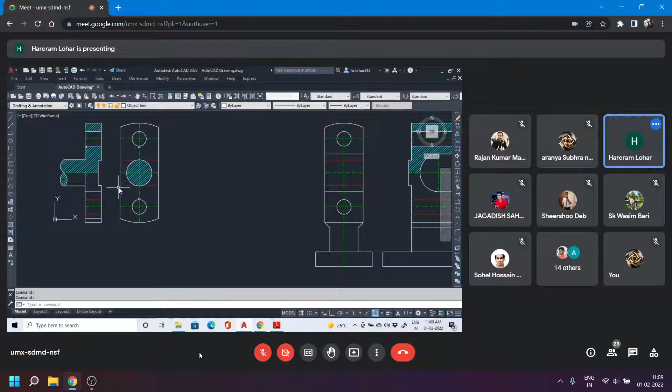So first you have to draw the details drawing using AutoCAD, and your details drawing will be of such type. You have to place the dimensions; I have not shown the dimensions here. So this will be for the rod end. This is the front view. This is the left side view. And this will be the body. This is the front view, this is the right side view. This will be the cover plate. And this will be the brass component. This is the front view, this is the side view, and this will be for the hexagonal nut.

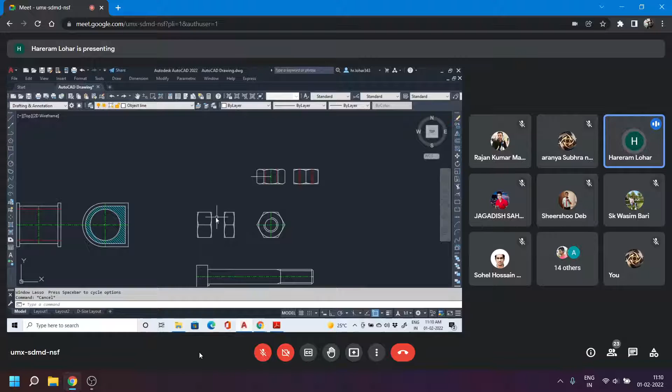So what will be the front view of the hexagonal nut? This will be that one. If you consider this one is the top view, the front view will be of such type, and the corresponding side view will be that one. In your drawing, you have to obtain the side view only, because this is the side view of the main nut, and this is the side view of the lock nut. Only this length will be different; the way the nut is drawn, the chamfer or radius, will be similar to the main nut. Only the height will be different. Here it will be 28, here it will be 20.

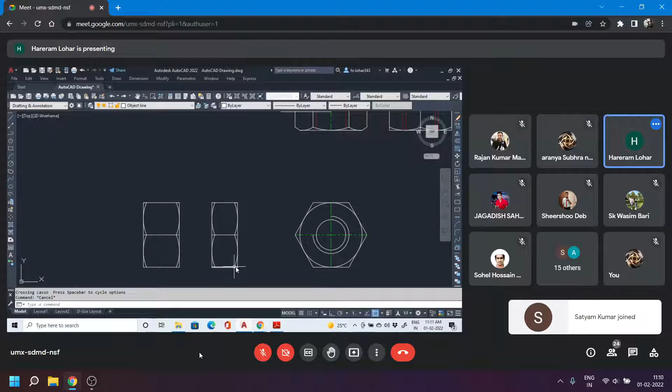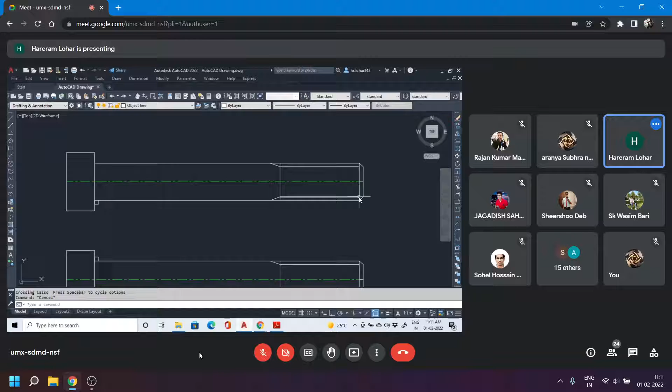And this one will be the bolt, a cylindrical headed or circular headed bolt. The shank portion will be there that we have already discussed, and this will be the threaded length. You have to represent the thread, so whatever the height of the thread, you have to show here. When the drawing is completed, to obtain the front view, you just copy the items. One copy of this main body portion you place here, then you place all other components. So you have to place this brass inside this slot.

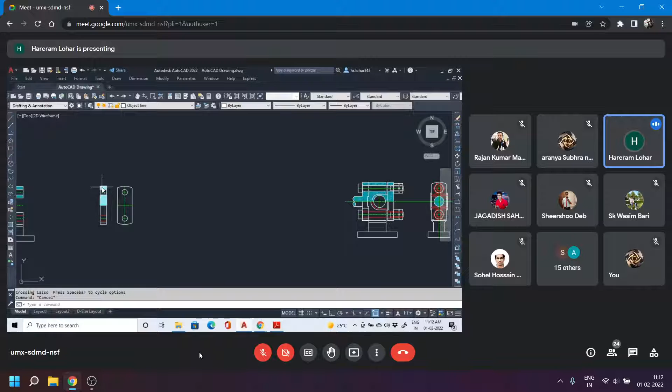Then on one side it will be the cover plate. Okay, one side it will be the cover plate. The front view of the cover plate you have to attach here. This one will be the cover plate. And on another side it will be the rod end. This rod end you have to attach. You have to assemble. Okay.

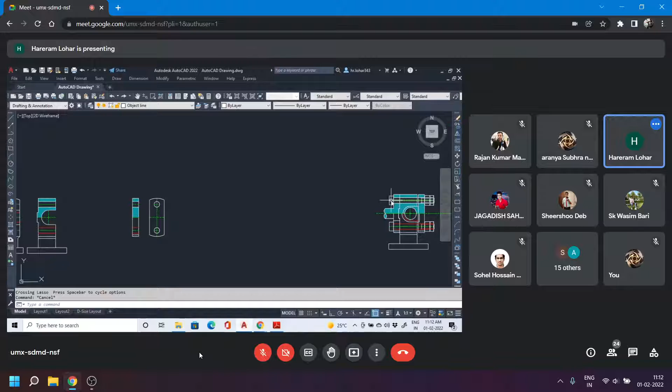Then you have to insert the bolt. Then you have to engage the nut, main nut and the lock nut. Then your drawing will be of such type, because it will be a half sectional view. So that's why the sectional view for the upper half portion will be there, and whatever will be the orthographic view, that will be for the lower half portion, not the sectional view.

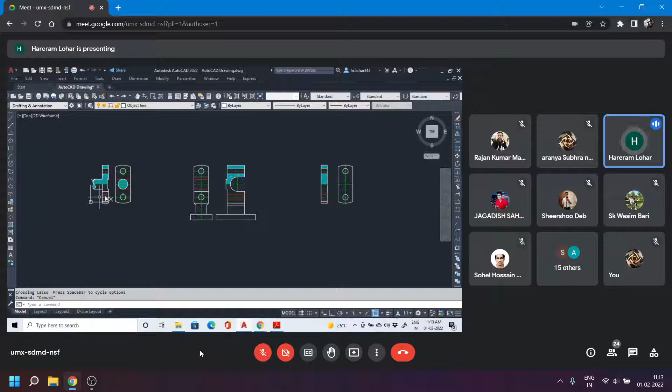Then again you have to obtain the side view of this one, and we'll draw the side view. All the component side views we have already drawn. So this will be the side view of the body portion. This will be the side view of the rod end portion. Again, this will be the side view of the cover plate component. So again, all the side views you have to assemble.

Okay. You have to assemble, and again, this will be the side view for the brass. So when all those components are assembled, the component will look like this one. This one will be the left hand side view, and of course it will be using the first angle projection system. We know it will be at the right profile plane.

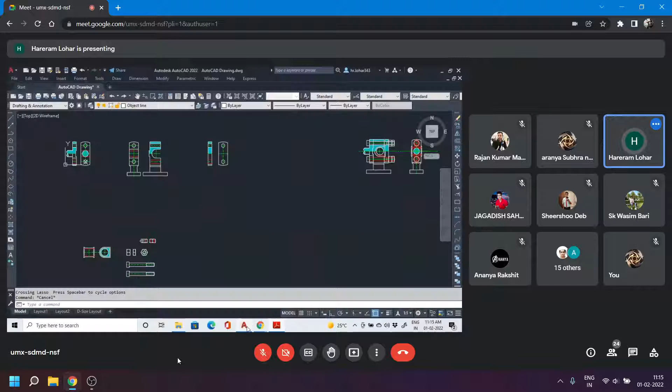What I actually want is that your assembly drawing will be there, and along with the assembly drawing the part drawing also will be there. Okay, so you can easily make the part drawings, and you can go for the assembly drawing as well. Just go to the layout, then one sheet will be for the part drawing and another layout you have to use for the assembly drawing.

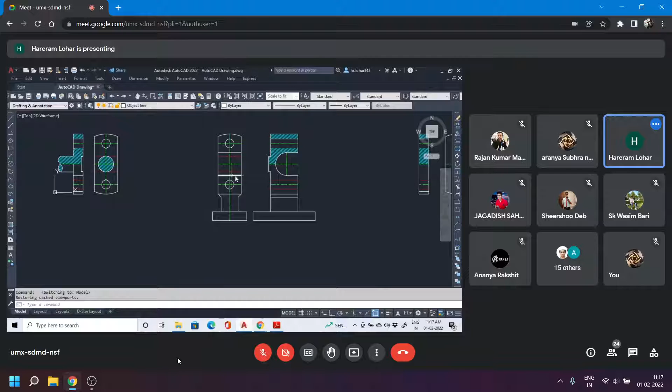And this will be the assembly. Now we can put all those things into the layout. One will be for the detail drawing layout, another one will be for the part drawing layout.

One will be for assembly drawing layout.

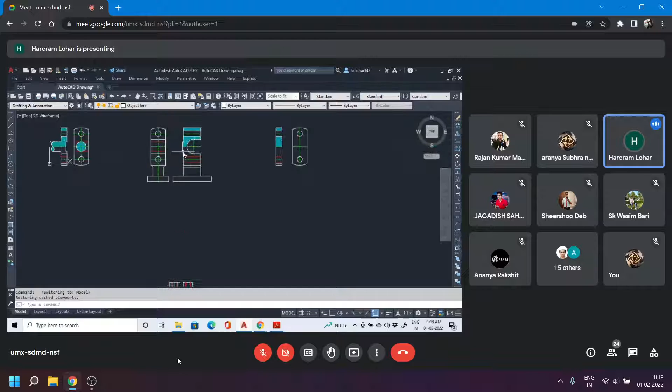Okay. If we go for the assembly, how the assembly will be there? Just look at these things carefully. First, you have to copy, because we want to obtain the front view. This is the main body, so that will be copied first. Of course, the base point will be this one, or you can select any other point as base point. So we are copying it here.

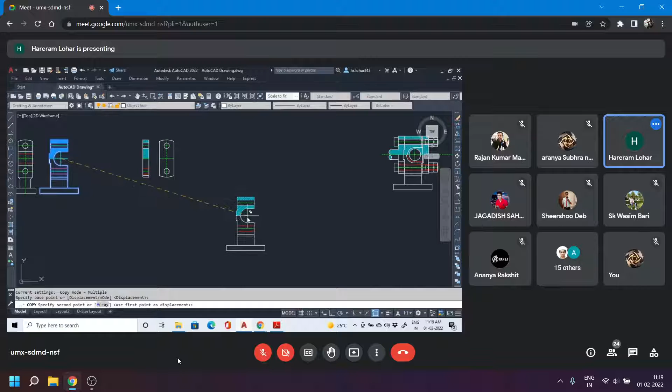Now we'll go for the brass. We want to assemble the brass inside that slot. So when we assemble the brass, you can find out from your figure this radius 36, because here this dimension is 72. This is nothing but the diameter here. So when the diameter of the semicircle is 72, of course the radius will be 36.

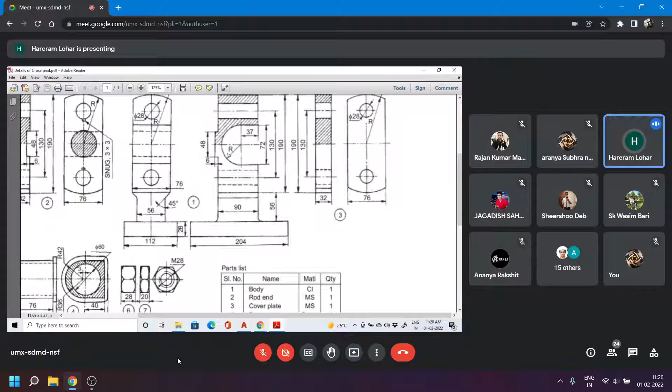And again here we can find the radius 36 is taken from an offset distance of 3 millimeter. It's very important. You have to observe that carefully. And when the dimension is placed here, it is placed from that point. So that's why we can ensure that the center for this 36 radius semicircle will be this offset point, offset from this point by 3 millimeter.

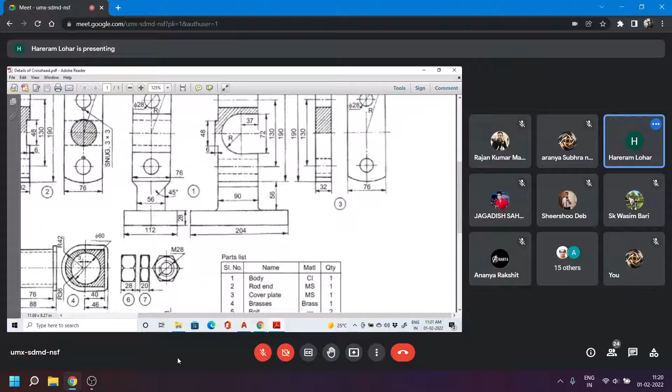So how will the shifting for these points be? This is the 3 millimeter offset point. I have finally deleted those portions. So this is the center for this full circle, and the 3 millimeter offset will be there. When we go for drawing, it will show here that this will be the end point. Then a 3 millimeter line will be drawn from this. This point you have to take.

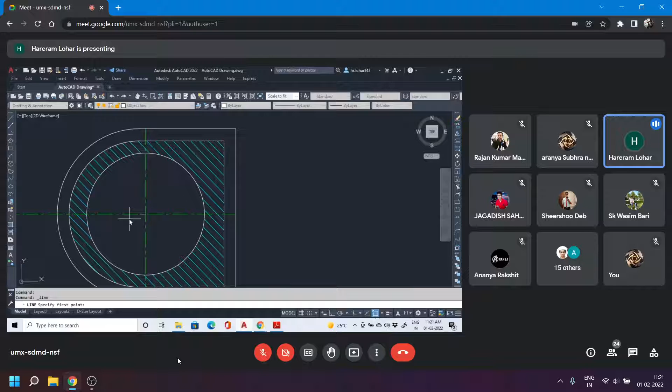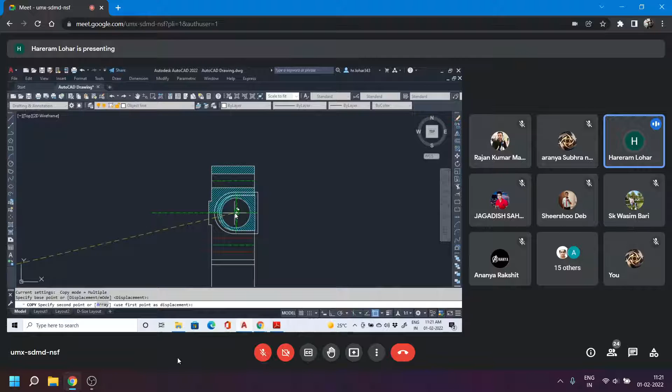Now you have to copy this brass component, the front view of the brass, and assemble it inside the slot. Here the base point will be this end point. Now this one will be placed here, at this point. The things will be in completely assembled condition. Clear? Yes, sir.

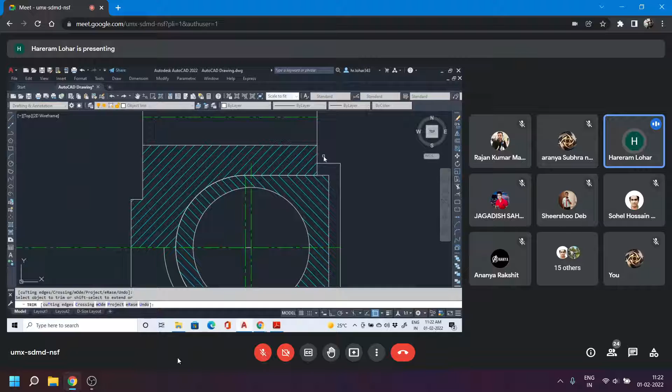Now, when it will be the sectional view, of course this line should not be there, so you have to trim that line. These portions will not be there because it's a sectional view. Collar portions will not be there. Now this hatching should not be there because it's not the full sectional view, it's a half section view.

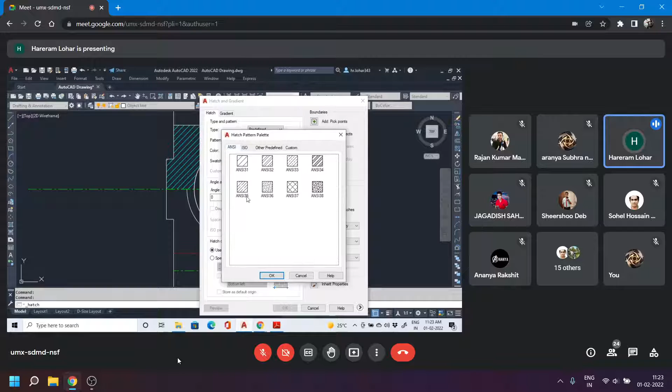So when you go for the hatching, modifications you have to do here. This total hatching you have to remove, then only these portions will be hatched. The hatching style will be ANSI31. I think the angle was 90 degree. This point should be hatched. Again, you have to go for a different layer for hatching.

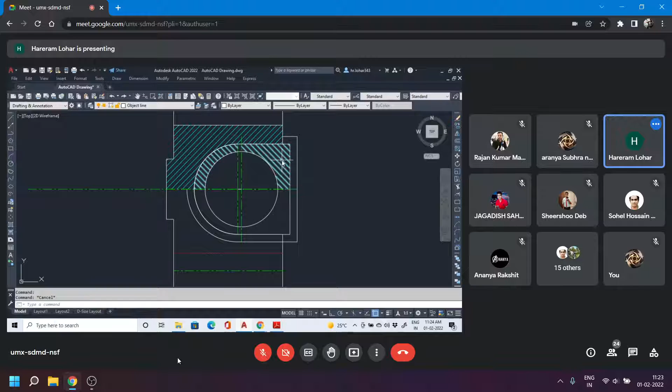You can change the color of this hatching as well, because these two materials are different: the body material is cast iron, and for these components the material will be brass. So we can use a different color for that hatch. Of course, the pattern of the hatch will be different, because the materials are different. So this type of hatching you can use, or you can change the color as well.

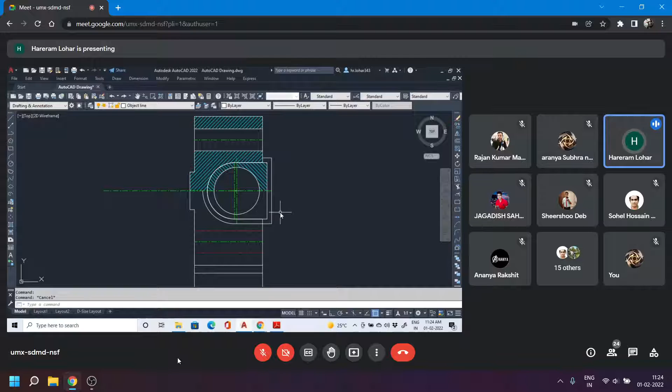Now some portions will not be visible. This line will not be visible when we see the other side, the orthographic view, which is not the sectional view. It will be a hidden line. And some other portions will be hidden lines. That representation you have to do here. So this one will be a hidden line, and this one will be the end of the collar. Of course, it will be visible.

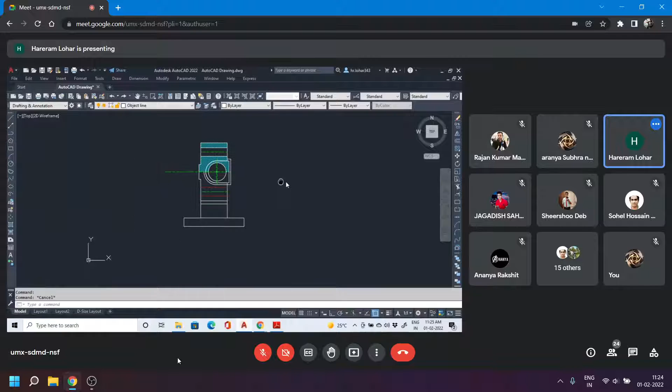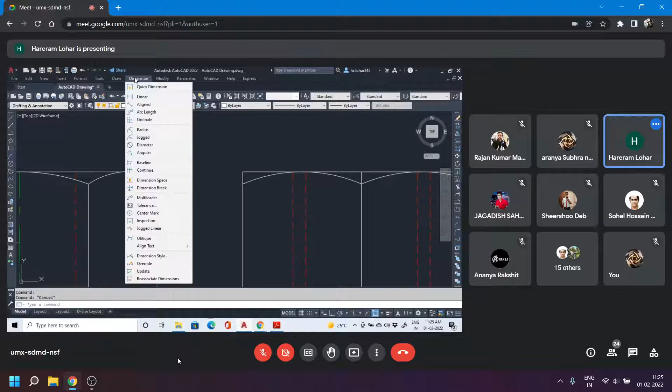Now here it's very important to discuss that when we draw the side view of a nut, it's required to draw the front view. Otherwise you cannot find out how much this chamfering height will be. This chamfering height, whatever that height will be, you dimension it by using linear dimensions. You cannot find this height unless drawing the front view, because that height is obtained from the front view, and that same front view will be projected to get the side view.

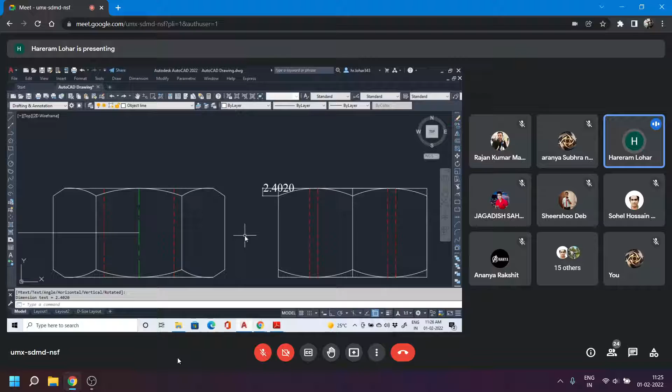Okay. So that's why, to obtain this height, this front view is required; only then can you get the side view. Otherwise you cannot directly draw the side view of a nut. Am I clear?

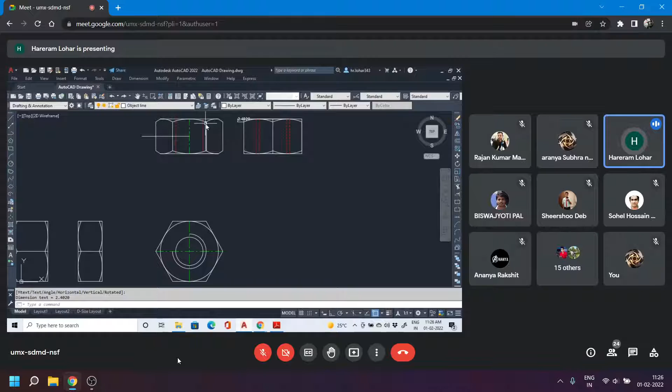Yes, sir. So this one will be the chamfering. So you have to project those things. Again, some chamfer length will be there. So when we project these points here and this point in the front view, these two points will be connected by a straight line. Then you have to draw an arc, this to this arc.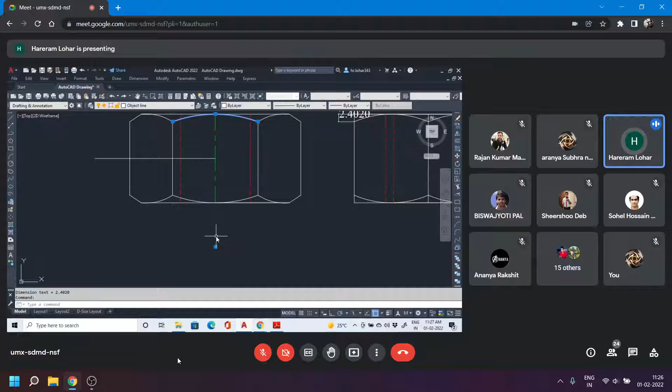That radius will be 1.5 times d. Okay. So how can we draw that? From this midpoint, 1.5 times d. The d value is 28 here, because the nut is M28. So 28 into 1.5, that means 28 plus 14, 42. At 42 distance you have to take a point, and taking that as center you can draw this arc. Now we will get the height.

So this 2.4020 height will be nothing but this one to this one. Then the corresponding point is known, and the middle of this one will again be known. So we can draw a 3-point arc through these points, the midpoint and this point, and for the other side as well. Now for the side view, you have to project this front view and this top view to get this side view.

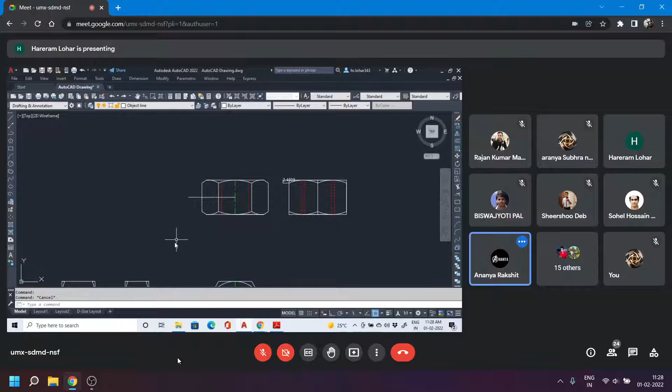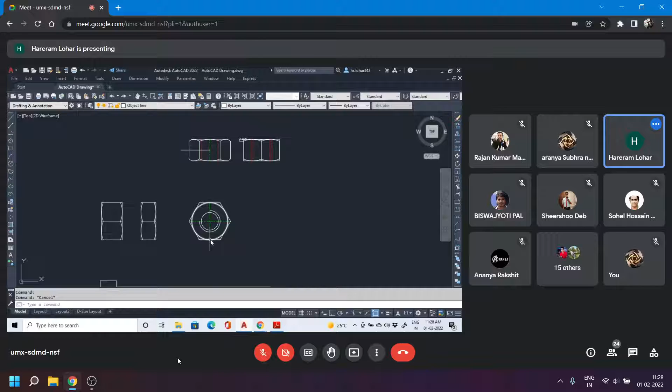Actually, if you look at the hexagonal nut, you can find out that one inclined line is being rotated. That means the chamfering is done. So when we see the top view, this inner circle we are getting will show you how much chamfering is done. And again, it will be an inclined line. Chamfer means, of course, it will be a straight line, an inclined straight line.

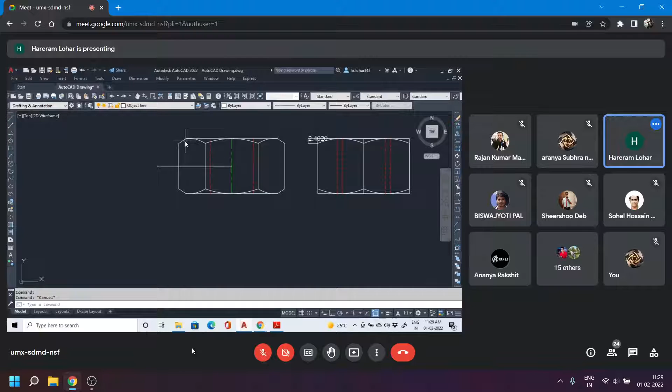Chamfer, yes, you have to chamfer. But if you see the actual view of a nut, you can find that some chamfering, of course, will be there. You can find that some chamfering is there.

So how to obtain this chamfer distance? Okay, the process is discussed here. This point you have to project. This is the chamfer circle; that one will be projected. Then you have to connect this point and this point by an inclined straight line. And again, when we see the three-dimensional view of the nut, you can find the chamfering is there.

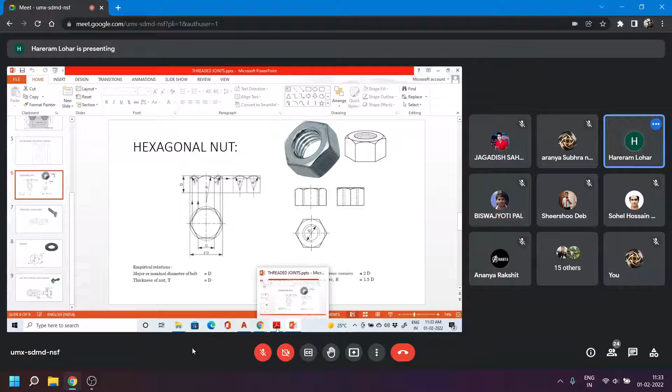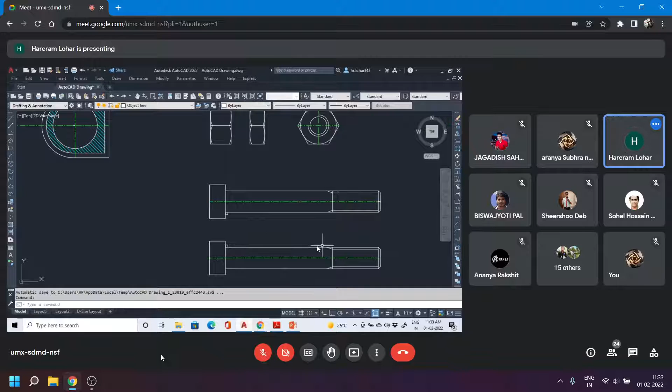Okay. And again, when the drawing of the bolt will be there, again draw those things. A single bolt is not required, so 2 bolts are there, and for 2 different bolts the snug locations will be different. So that's why when we draw that one, just by mirroring this bolt you can obtain that; the snug will be on the opposite side.

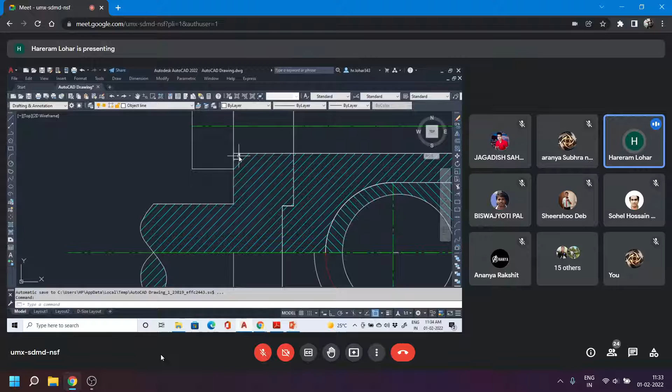And again, to assemble the bolt, whatever snug will be there, that will be in assembled or aligned conditions. Properly, it will be fitted inside the cutout portions. Okay, here as well, it will be inserted properly.

And again, when we see the left-hand side view, I have checked some copies where they have represented the nut as a visible line or object line. But it will not be the object line because we're obtaining the left-hand side view. So it will be at the right plane. The nuts will not be visible; that will be the hidden object.

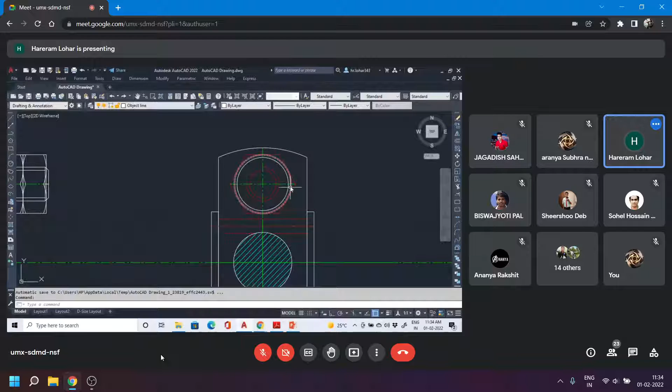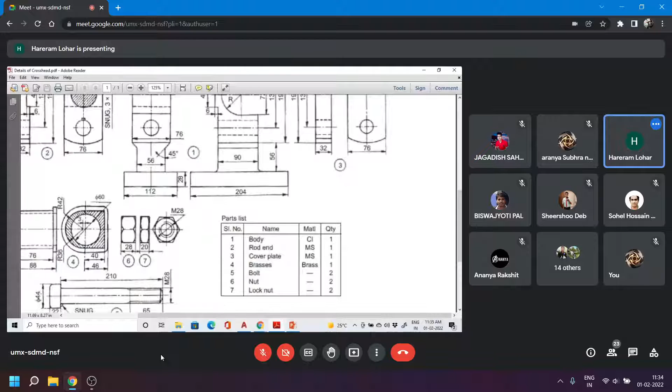Okay. Only the head of the bolt, that is the circular head, that circle will be visible. And when we place the dimensions, what was the dimension for the head? It was 44. The diameter will be 44. So that circle will be a visible circle.

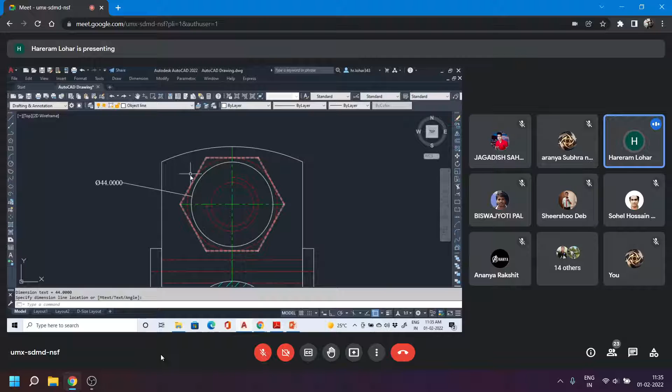Okay, so this one is 44. This one only will be visible, but on the other side, whatever components will be there, the nut and lock nut will not be visible.

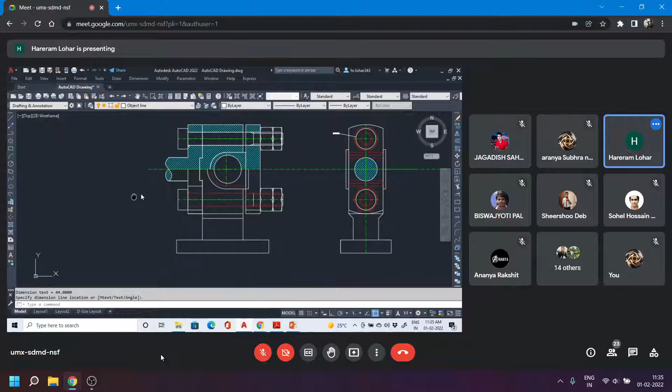Okay. And again, when we place the brass inside the slot, in the side view of the brass these two collars, the extended portions, will be there. When we place it in the side view, you can find these two extended portions, and that one will be completely visible.

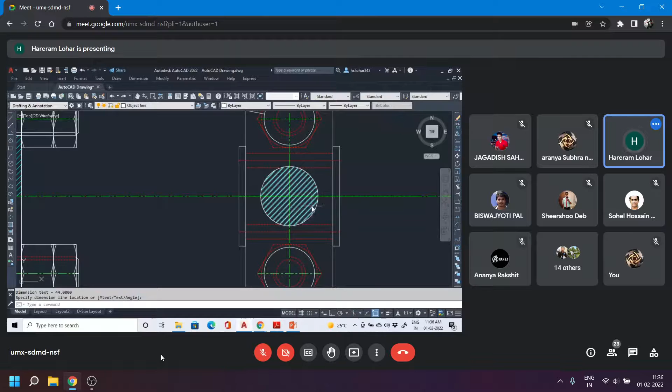Okay. And this is nothing but the piston rod side, which we have already cut. So of course hatching is required, although the side view is not the sectional view. To obtain the drawing, we have cut some portions of the piston rod, so cutting is required. So that's why this one again will be hatched. Okay.

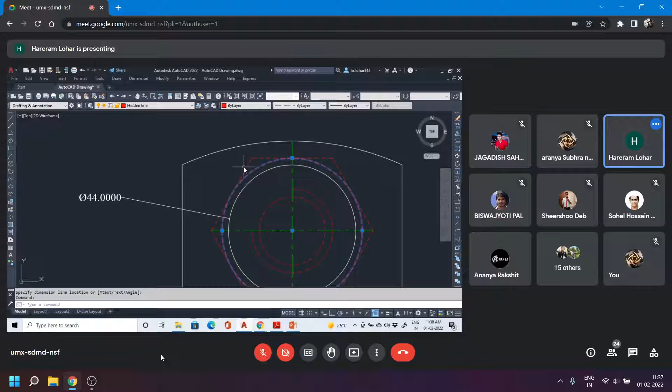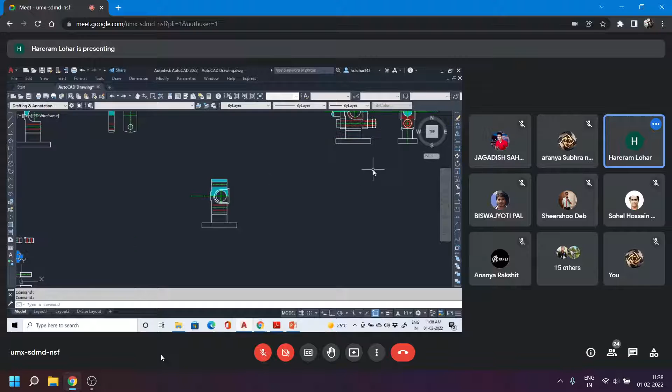When you draw the top view of the nut, if you consider this one is the front view and this one is the left side view, this one will be the top view. So this one is the chamfer. Okay. So that circle again you have to represent here, because some chamfering is there. It will not be visible from that side, so it will be hidden. Clear?

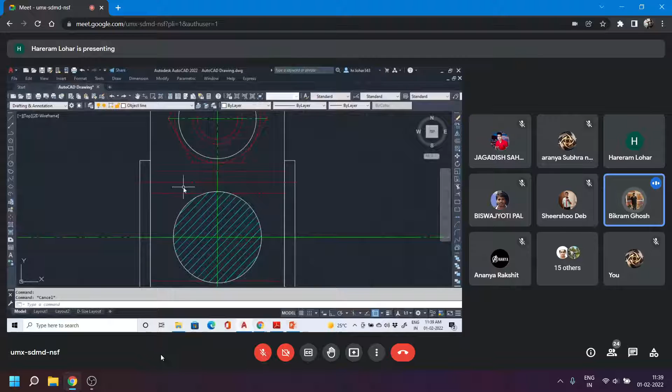Yes, it is here. If you see the front view of the body, you can find out this elevated portion is there, some extended portion is there.

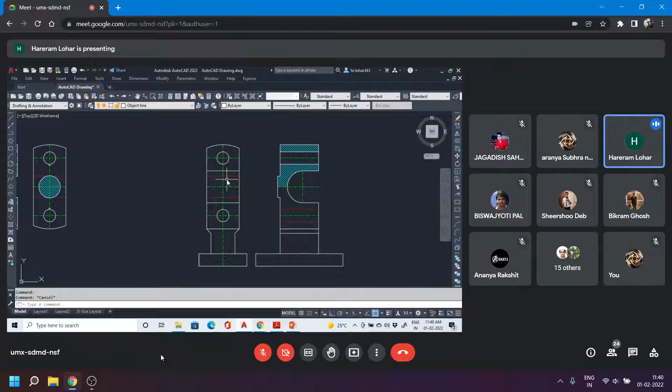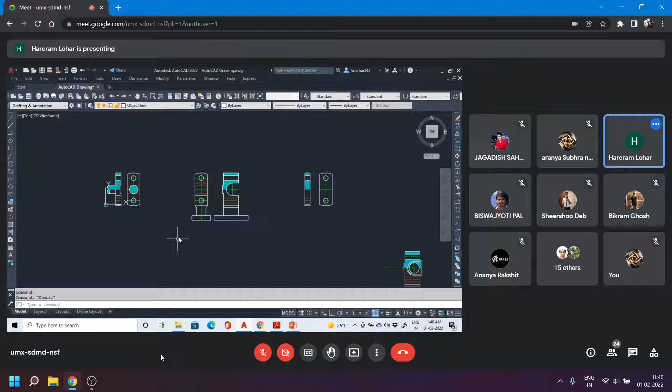You copy all those side parts, so this one, this one and this one, and if you assemble those things, automatically this type of figure will be there. Now you just have to carefully observe which one will be visible and which one will not be visible. Doing that, you can complete the drawing. It will not take that much time. Within a few minutes you can do it. Maximum it can take 15 minutes. The things will be assembled.